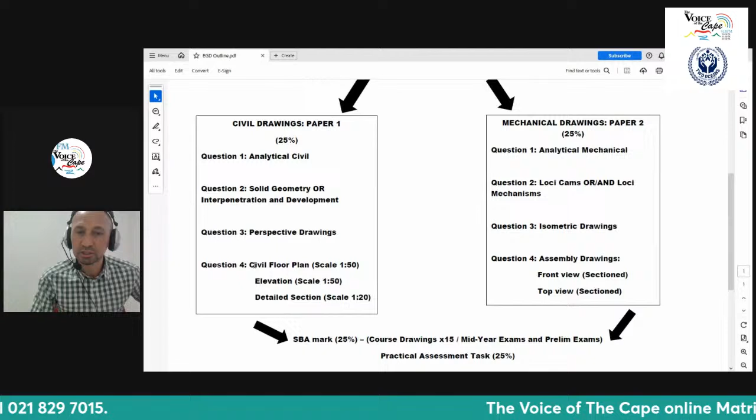So let us quickly look at where we are at the moment in terms of our sessions, where we started. I just want to go to that specific document and ensure that you look at where we are, so that we can navigate ourselves through the particular session that we're going to have now and for next week as well. Remember I started with this very document that I have on screen, which I'm sharing. We started at question number 1. We are now at question number 4. We've done civil floor plans last week, where we did a floor plan where the walls were given to a scale of 1:50.

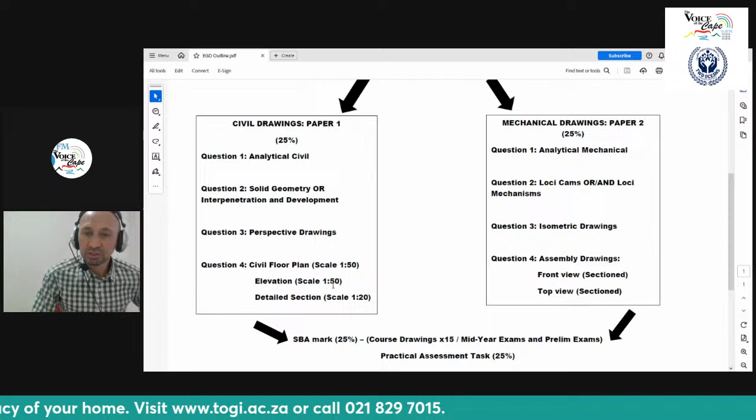And we continue with elevations. This particular week, we're going to look at the elevation which must be drawn on top of the floor plan. I'm going to change to my working document camera now, where I will show you exactly how to do the elevation. Keep in mind that both the civil floor plan and the elevation have a scale of 1:50. That is what our session is going to be all about this week.

So without further ado, let me change my screen and go to my workstation, and you will see that there I have the floor plan which we did last week. Now, this document that I'm viewing now is very important. Remember, all the information comes from this document, and last week we did 4.1, where we looked at the floor plan up until the 4th bulleted point.

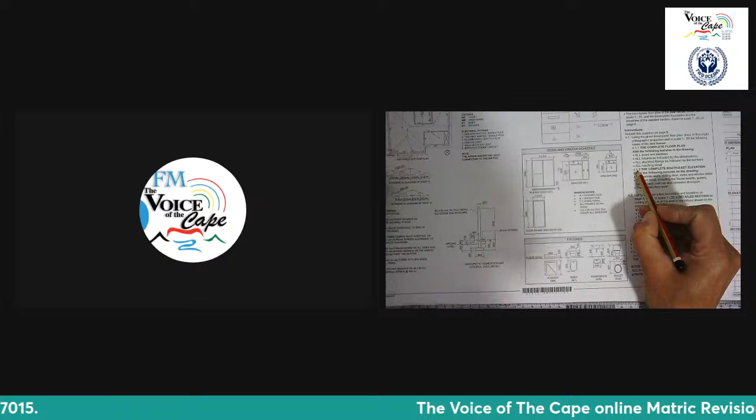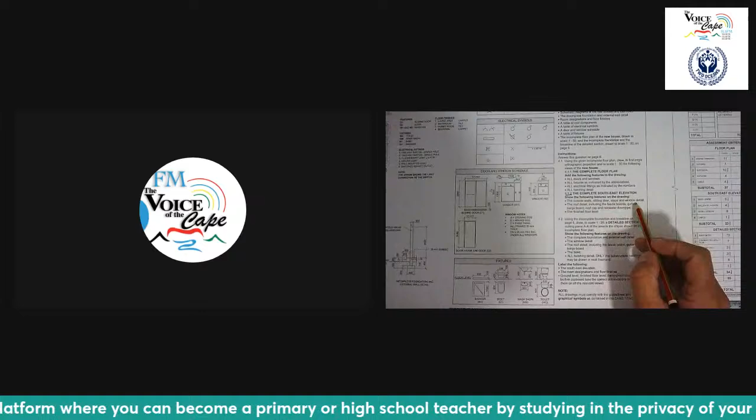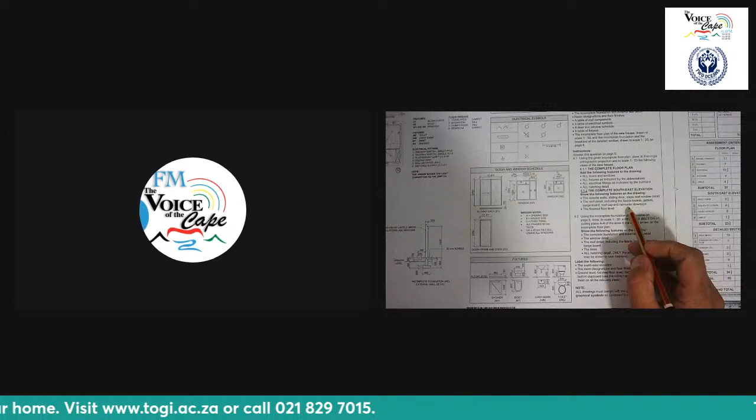We did all the hatching. This week we're going to be looking at 4.1.2, which is the southeast elevation. We need to complete the southeast elevation, and you will see that information is right here on my instruction page. I'm going to read it to you: you need to show the following features on the drawing - the outside walls, the sliding door, the steps, and the window detail. Bulleted point number 2, you need to show the roof detail, including the fascia board, gutters, barge boards, roof cap, and the rainwater downpipe. And finally, you must conclude with the finished floor level.

So those are all the things that we need to be able to do our elevation. On top of that, they even show you here what the elevation looks like.

So no learner doing this paper in Matric can say that you are not given sort of a head start. You are given a head start by the actual diagram of the elevation. The incomplete diagram of the southeast elevation has been given to you right there.

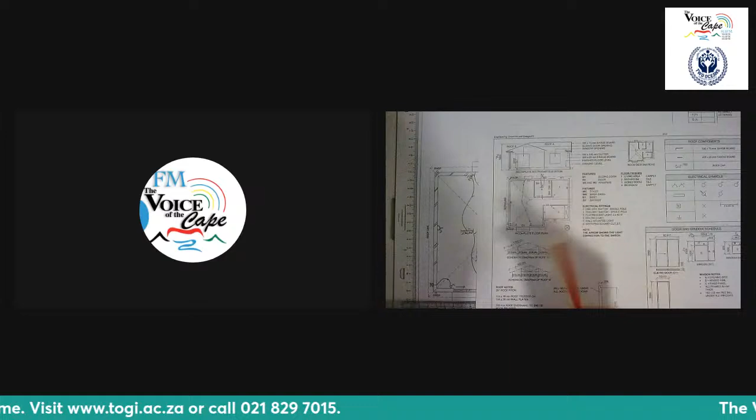All you need to do is project up so that you can complete this southeast elevation. Keep in mind, grade 12s, that the southeast elevation is this part of the house, which is where I'm showing you right now with my pencil. You are literally standing where I'm pointing my arrow and where my pencil is.

So I can see this D1, which is my sliding door, which is that over there. Let me just bring it down for you. I can see this D1, which is my sliding door over there. I can see the steps.

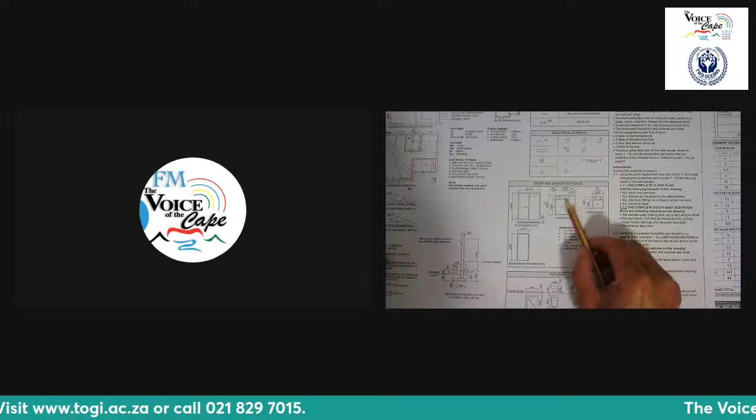That's there. I can move over to this side where I see W1, and you will see that W1 is the window 1 that we will see here, and the detail of window 1 is given here in the door and window schedule. So if you need the information for that particular window, you need to find it here.

Keep in mind, you have to scale it down because these are real dimensions that are given on the instruction page. You will also see that the roof lines are here in dash format, and the roof lines link up with these roof lines that you will see here.

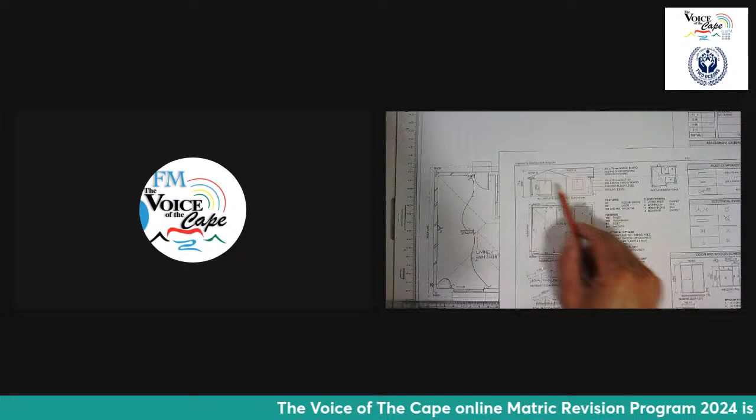You also will find in the instruction very clearly that there are break lines. Now please, what we've seen too many times during our exams is that learners actually draw these break lines. The break lines are there just to give you an indication what must follow through. So you have to follow through with that fascia board and gutter that you will see here. So that's all going to come out in my drawing.

Okay, so the first thing that I'm going to do now is project up, keeping in mind that I'm standing where my pencil is, and I'm taking a photo with my camera, and that is where that picture is going to be pasted.

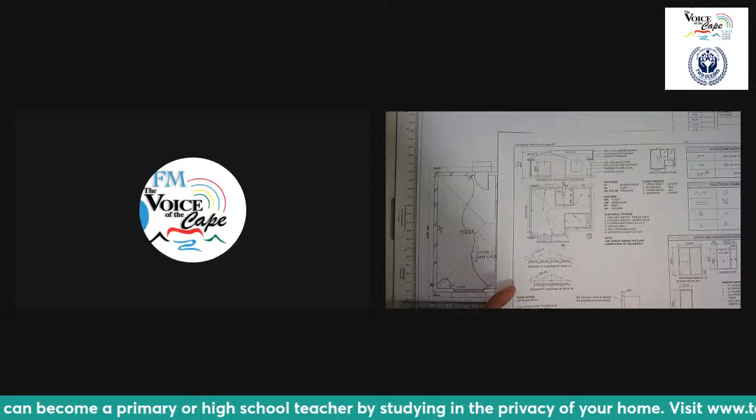I'm going to give you the structure very quickly, and then I'm going to refer every time to where I actually get the information. So the first thing I'm going to do here is project my walls. So you will see this wall going up very faintly, of course, and I'm going to draw up this wall over here as well, which is the start and the end of my elevation.

But of course, you will see here right at the bottom that it takes a 90-degree turn because that wall goes in here at the bottom. So there's another corner that formulates here, which I am going to project up to my elevation as well.

Okay, I'm going to zoom in on that elevation in a moment. So I just need to get my three corners.

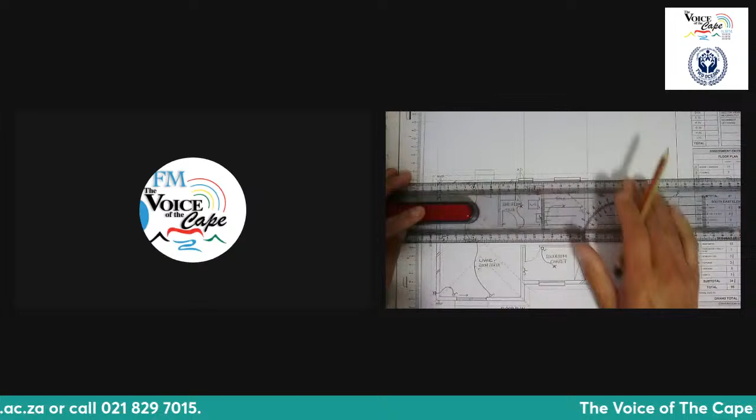And once I have my three corners, the next thing you are going to do, if it's not given to you, grade 12, is to create a natural ground level here. So I just want to show you in the picture my natural ground level, which I'm going to create at some distance away here, not too close to your floor plan. Allow yourself some space, but not too high because you have limited space on top of your drawing. So I would suggest maybe just enough space to write the south-east elevation.

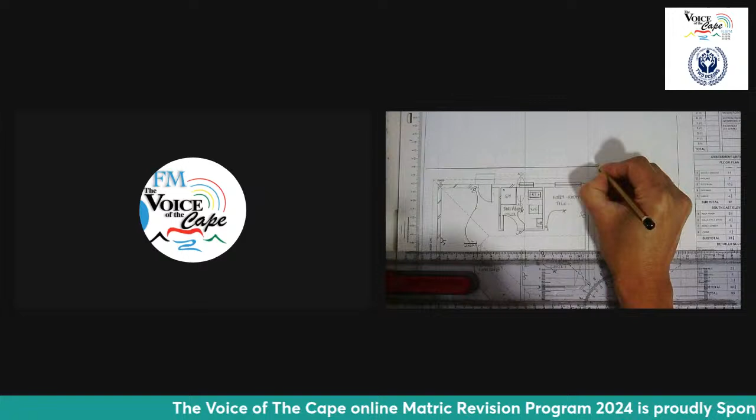So I'm going to draw a line here, and I'm going to darken that line immediately because that is my natural ground level. You'll see that it continues further than the wall corners which I've drawn. And once I have drawn that line, immediately I'm going to write on that line 'NGL', which basically abbreviates natural ground level. And for that, you're going to get a mark later on as well.

Right, and now I will have to go back to my instruction page because what I now need are the heights. I see here a height of 3,800, which is 3 meters 800. Keep in mind, I must divide that by 50, and it's going to be 76. So that will be 76. And with that, I'm going to measure, and I'm going to move my camera up so that you can see a 76, which is quite high.

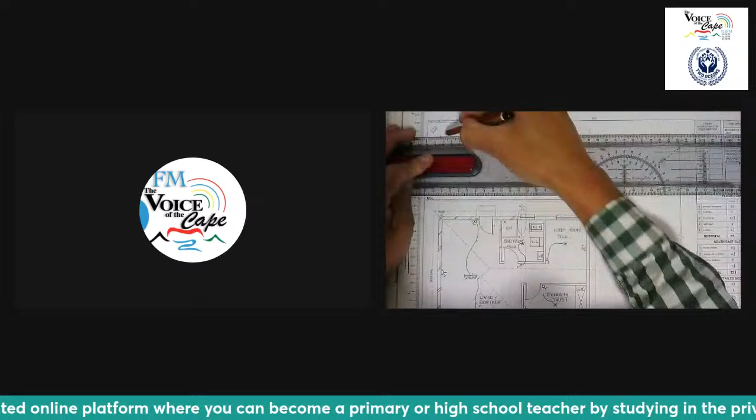And I just want to show you where that is in my camera. That is 75, 76 would be right there. So I mark my 76 and draw that line right through. That is now the height of the top of my roof, my 76, which is 3.8 meters.

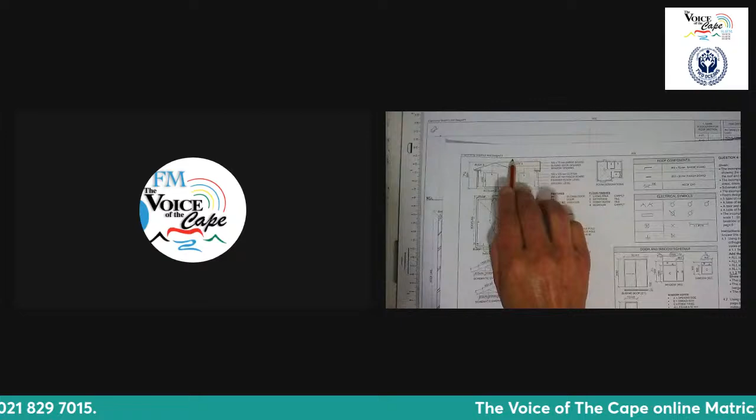I also now need to know that this line here is obviously this line that you see in my floor plan. So I'm going to project that down. In fact, this point here is the section I'm busy with right at the top, so I have to take it from my roof line. I'm going to project that line up till there.

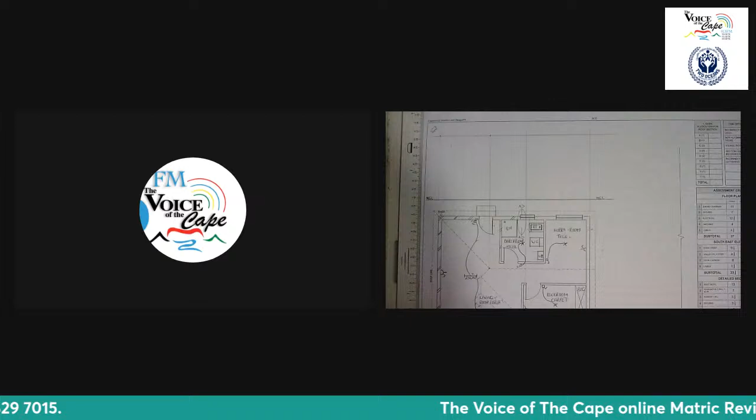And that is where the straight section would be in my instruction. That is the straight section. Then from there are angles this side and that side. And the angle is going to come from this particular line, because it sort of staggers like that. So I'm going to bring this line up here as well from my floor plan, and that is going to be my apex, which is the apex I see right over here.

So there's a difference, a height difference between this roof A and this roof B here. You can see it indicated in my floor plan as well, but you can't see the height difference directly, you'll see the line being staggered to one side, which means there is a height difference.

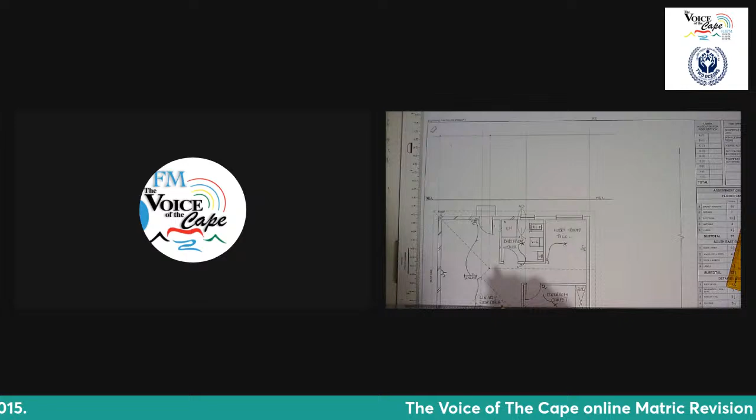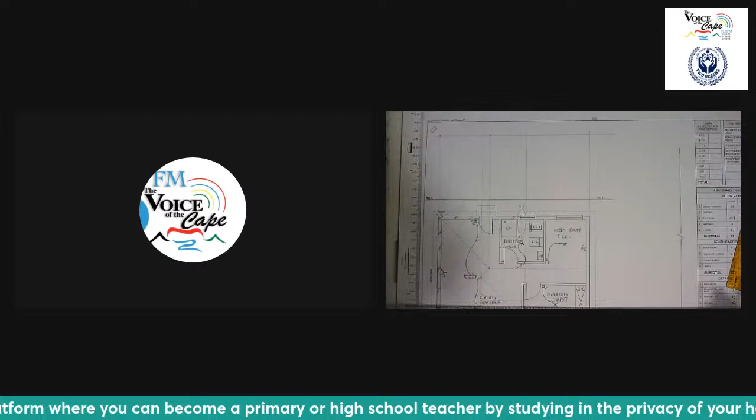Now there are angles here which we need to place. For you to find what that angle is, you have to go down to where it indicates roof notes. The first thing you'll find under roof notes is that your roof pitch is 20 degrees. So you need to go and find a protractor.

For 20 degrees, I'm just reaching for my protractor. And here I find a protractor. Remember, a protractor is a curved ruler. You need to make sure that this angle down here is going to be 20 degrees, so I'm going to flip my protractor upside down like that, and then place my center point perfectly on that point over there.

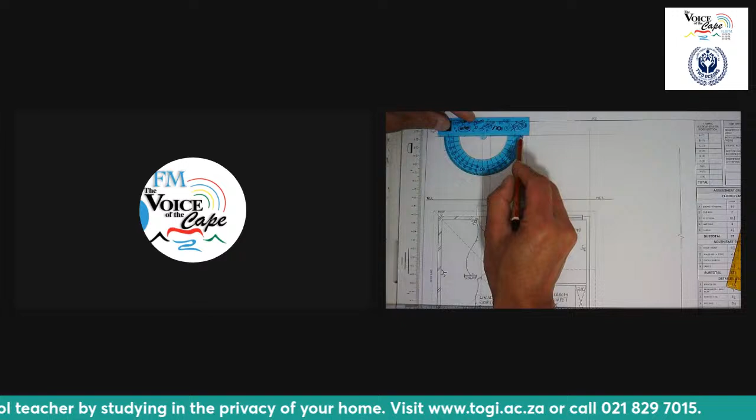There is my protractor, my zero is on that line, and I'm going to measure 20 degrees from that zero, 10, 20, right there. And I can do the same on this side, 20 degrees on that side. Once I have that, I can draw a line from my apex point that way, and a line from my apex point this way. And there I have now created my 20 degree angle that I have in my incomplete southeast elevation.

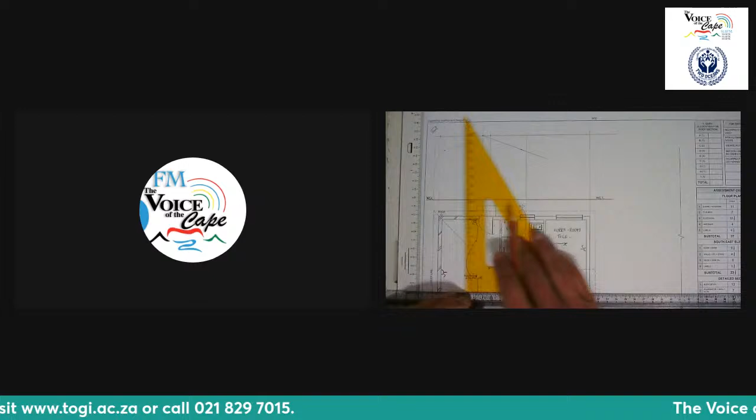But now remember, the roof has an overhang, and you'll see the overhang here on the sides, the roof being indicated by a dash line. So we need to project those lines from your floor plan up that way. And you'll see there is another one right here at the bottom, which I'm bringing up and projecting up.

This point is now very important, and that point over there. What you need to know is that there is going to be a barge board or a fascia board, a fascia board that runs right through, and that fascia board is going to be right here where the break line is. Keep in mind that point right there is this point over here.

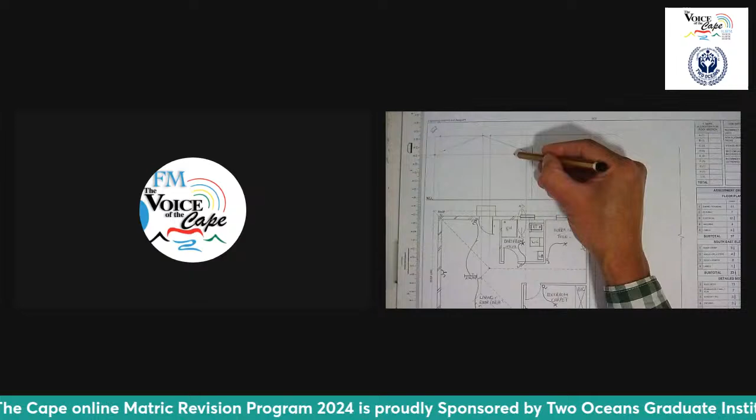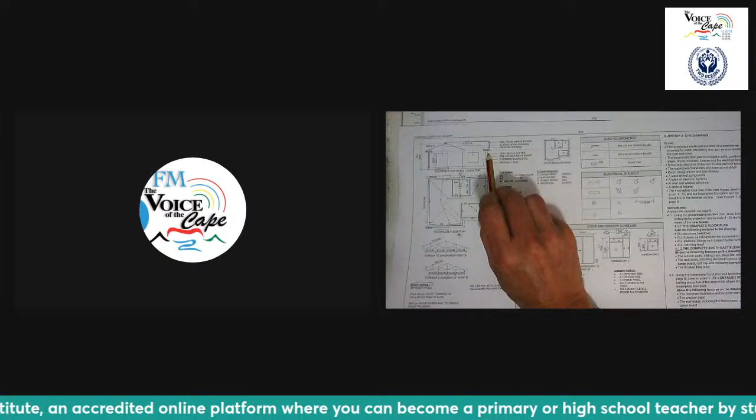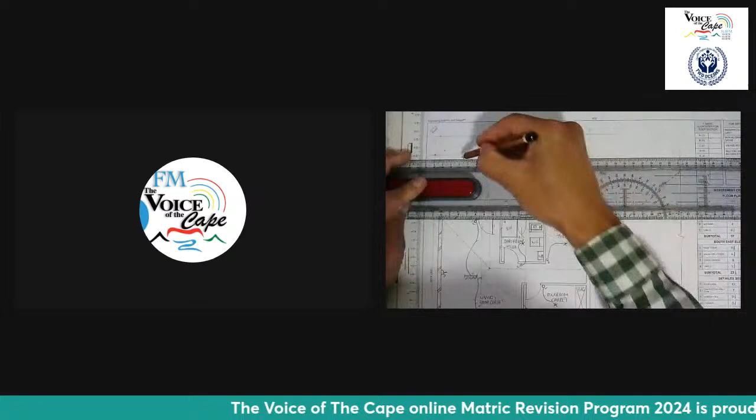So what I'm going to do is draw in my fascia board faintly. There's my fascia board, and my fascia board has a drop of 200, because it states here in my notes that it's a 200 by 20 millimeter fascia board, which is that over there. The thickness is 20, so that's not taken into consideration, we just need the height of the fascia board, which will be the drop from the top. So 200 divided by 50 is going to be 4 millimeters. You just need to measure 4. There's my 4 millimeters, and I'm going to draw my fascia board right there.

Once I have my overhang and my fascia board here, I can also ensure that attached to my fascia board is going to be my 150 by 100 millimeter gutter, which I'm going to place in. So 150 by 100 simply means 100 divided by 50, which is going to be 2. So I'm going to place that in the middle.

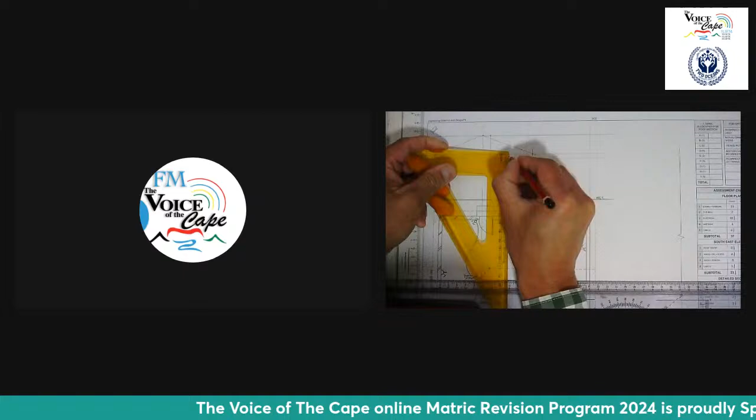Literally, I'm just going to measure 2 millimeters down from the 4 and have a line perfectly in the middle. Doesn't have to be in the middle, but if you can get it there, that would be perfect. That line in the middle represents either the top or the bottom of your gutter. So there we have that, it's in the middle.

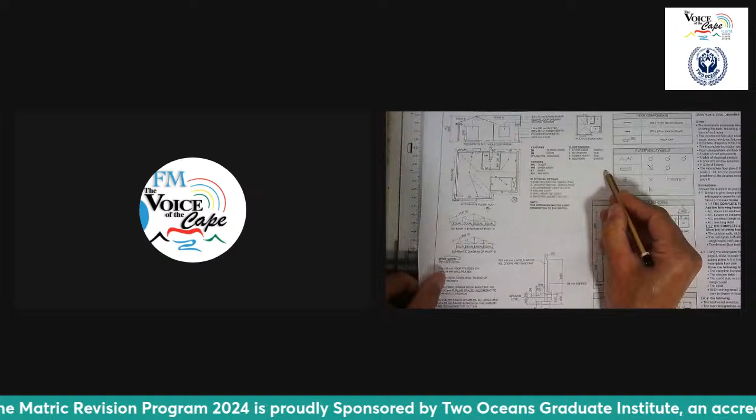On this side, you will see in your instruction that the gutter makes a return on the side. Now that little return that you will see here, I want to zoom in on that section. So there's your angle. This is the fascia board, that is 4 millimeters. Your gutter is in the middle there.

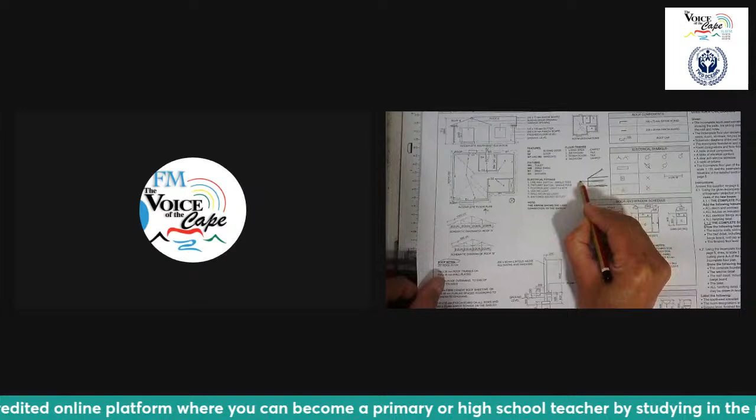Now, if your gutter is at the bottom, there will be a return, meaning that this return will be 3 millimeters further than the gutter. Keep that in mind, 3 millimeters further than the gutter. So on this side here I'm going to measure 3 millimeters, and here also 3 millimeters, which is going to be my return.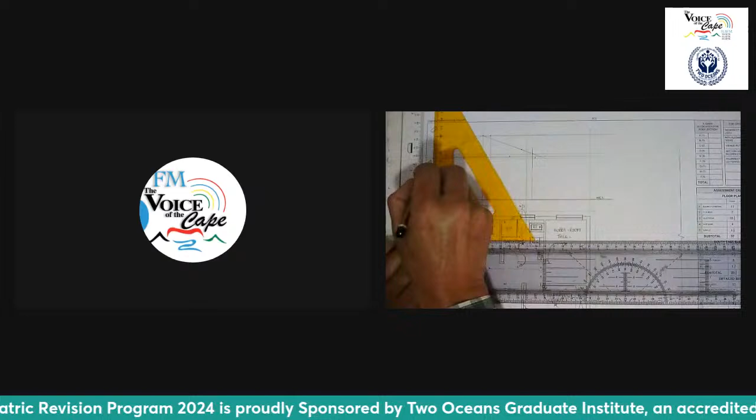And now I'm going to start darkening things. So I'm going to darken that 3 millimeters here, and I just want to zoom in a little bit so you can see clearly what I'm doing. I've darkened this short little line there because that represents the return.

And then I'm going to draw my fascia board, the top of my fascia board and the bottom of my fascia board, which I'm clearly marking now.

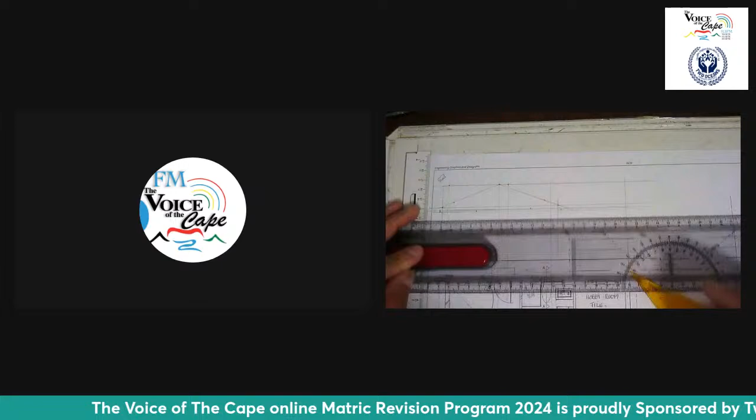Just before I do that, I'm going to do the gutter on this side as well. Here's my gutter, which makes a return on this side. I'm going to draw a line at the bottom, right through till there, and then another line right through till there. That line is the gutter.

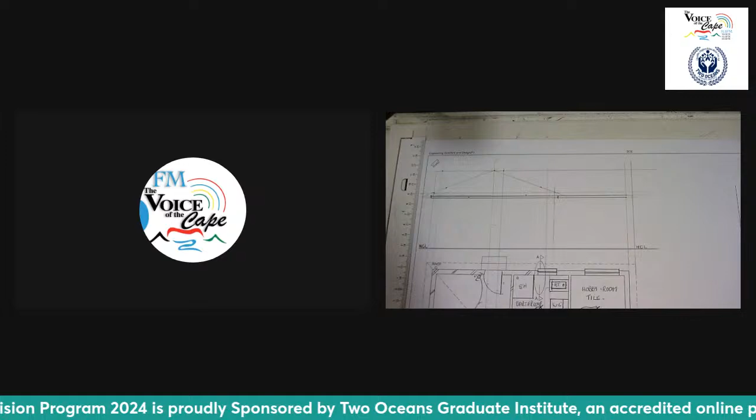Keep in mind that on this side, grade 12s, there is another overhang part here that we need to project up as well. Luckily this one is just a line that goes straight up, there is no slant on this section. You can see in your instruction there's no slant here, it is literally a gable-ended roof, a roof with barge boards on the side. So that can just go straight up, like I've done now.

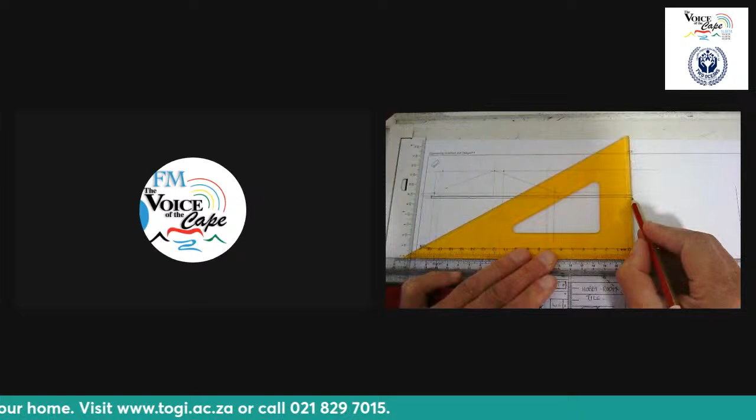So my dark gutter will go right until the end of that overhang, and I'm just going to stop it right here. With a gable-ended roof, the gutter does not go and return on the side. It only happens when there is a side that's slanted, where you have the slanted side here and the slanted side there, which means the gutter will return on the side for the water running this way and that way.

This is in fact a hip roof, which means the gutter will go right around, and the roof slants from all three sides - this side, the front, and this side here. But on this side, it is what we call a gable-ended roof.

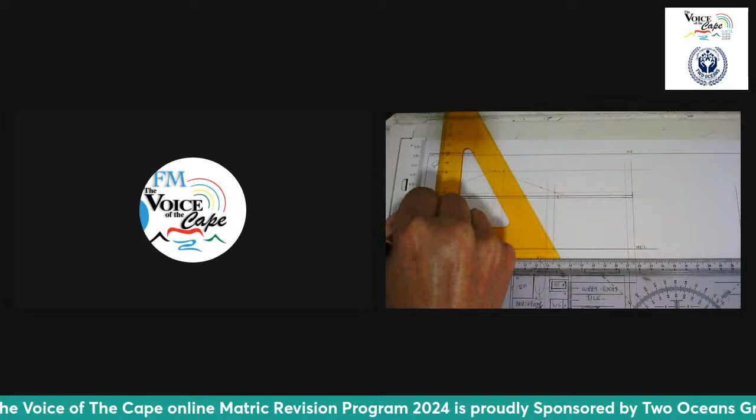Okay, so now I'm going to bring in my fascia board, the top part of my fascia board, which I'm going to draw here, drawing a solid line from one side to the other right through. And then I can bring in my slant of my roof right there, which is dark, and my slant of my roof, which is going to be dark right there. This obviously continues to this side here.

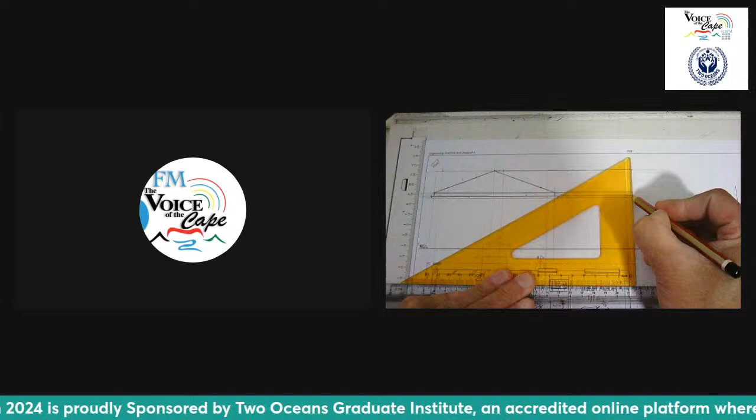And remember, this is all coming from my given incomplete south elevation. I just want to show you again, that is basically what we're drawing at the moment, but we're adding the detail that is supposed to be added according to the instructions.

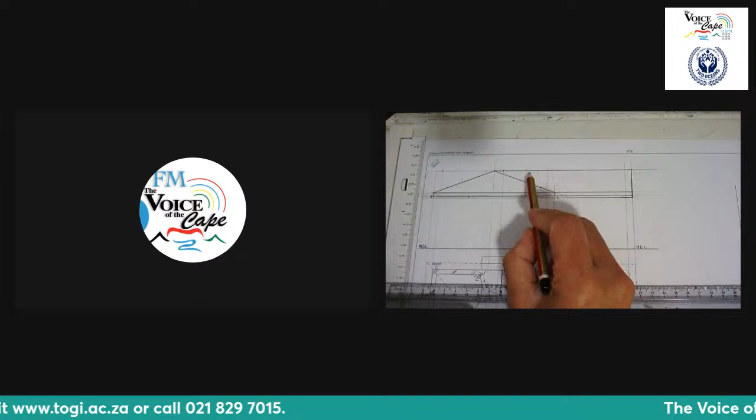When we add the roof, it is not fully completed. This is where learners actually lose a lot of marks, because you need to add a double line, which is literally 1 millimeter on the inside. That line is what we call roof capping, and it's just 1 millimeter on the inside.

You do get marks for both these lines, and many learners just leave out the one line on the inside—they don't show the roof capping. So we only allocate 1 mark if you leave out the other one, because one mark is for the height, and the other mark is for the roof capping.

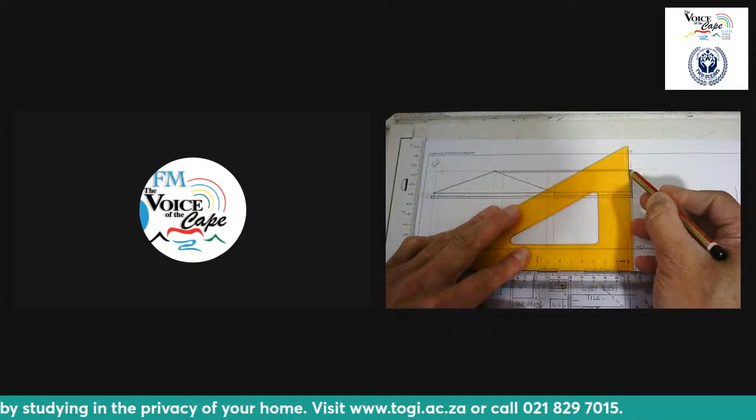Also on the side here, you need to add another millimeter line on the inside, which now represents your barge boards on the side. Many learners do not have those lines available because they only draw one line, so these lines are not available in many of the drawings that we mark.

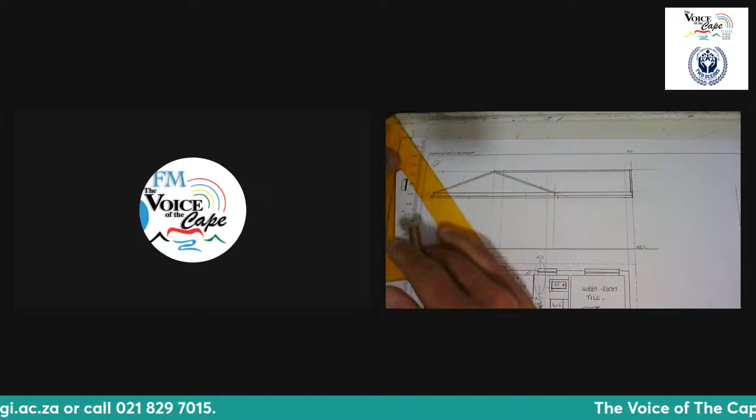So if you are looking at this video, please make sure you add double lines, literally 1 millimeter on the inside. The same applies to these slanted lines here—you put a millimeter on the inside, nice and dark, and a millimeter on the inside. If you include these double lines, every time there's a double line it's a mark: 1, 2, 3, 4, 5, 6, 7, 8. Those are all available to you at that moment.

Once you have that done, you obviously have to look at your downpipe, which is going to come in later, which I'm going to show you. But just before we do that, I want to bring in the walls.

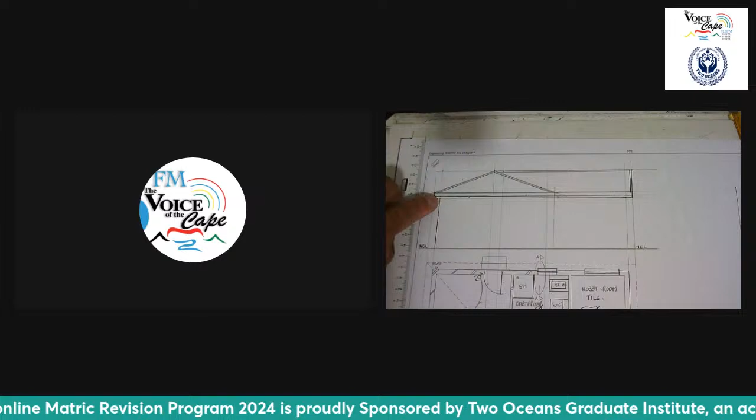Grade 12s, keep in mind I'm just sampling this for you so you can see exactly the format of how to do these drawings, how to do the roof, where to add the double lines. Because this is an overhang, you will find the walls will be right here, right under the fascia board. The wall for the one side of the front part of the house will be coming in there—that's the overhang. And of course here you will see the other wall ending. You can see there it all comes from the parts you see in front of your house where you are standing looking at the arrow.

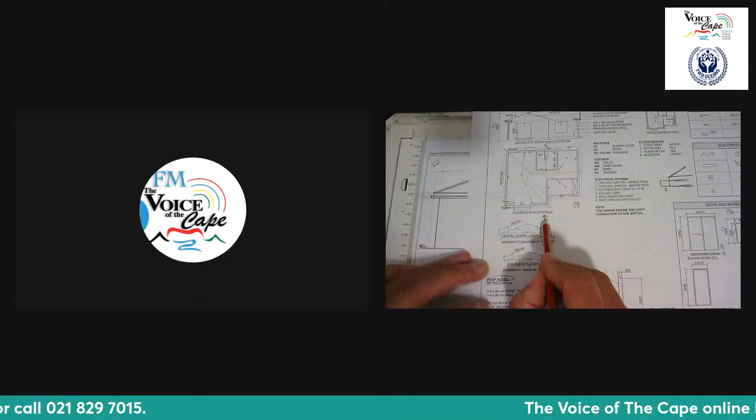Keep in mind there must be 3 lines for the fascia board: 2 of them represent the fascia board, and 1 represents the gutter. If you have the gutter sort of in the middle of everything and you have 4 lines, you are still just going to get 3 marks.

Keep in mind that you will have these lines serving as the roof capping and the barge boards, which you will have as a double line, meaning double marking. And then you will find the walls will just be on the inside, which creates the overhang.

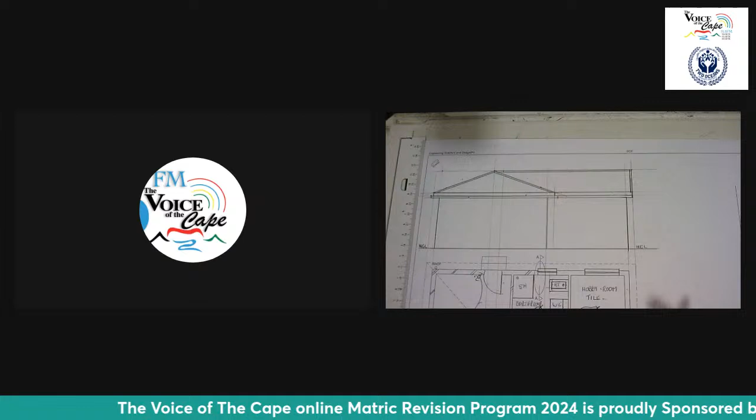What's going to happen next is you need to bring the downpipe into consideration. If you look at your drawing, you will find on the instruction at the bottom it says RWDP, which is in front—that is called the rainwater downpipe, abbreviating rainwater downpipe. You have to take that circle on your drawing.

On this floor plan, you will see it at the bottom—you can't see it now because I'm zoomed in. You have to project it up and create that downpipe that you will see running down here from the gutter. So I'm going to project mine up, and you will see clearly what I'm doing.

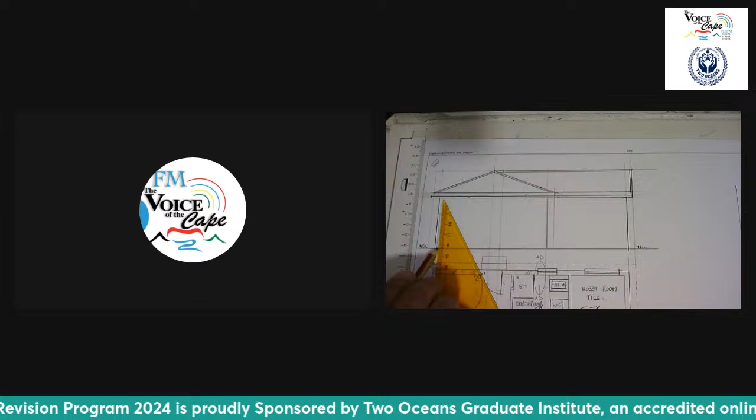So there is my one side—it's a very thin component coming up from the round downpipe, and I draw it until it reaches the gutter. If they don't give you the height where the shoe opening is, you simply put that in close proximity to where you find it on your drawing. Then I'm going to highlight my sides, and highlight this side here where my gutter is formed.

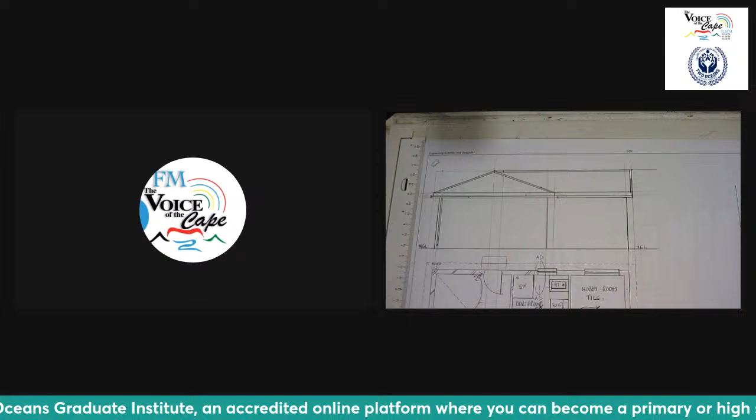You will get 2 marks for each of the lines and 1 mark for the exit point of the rainwater downpipe. We continue by now looking at the natural ground level and the level above that.

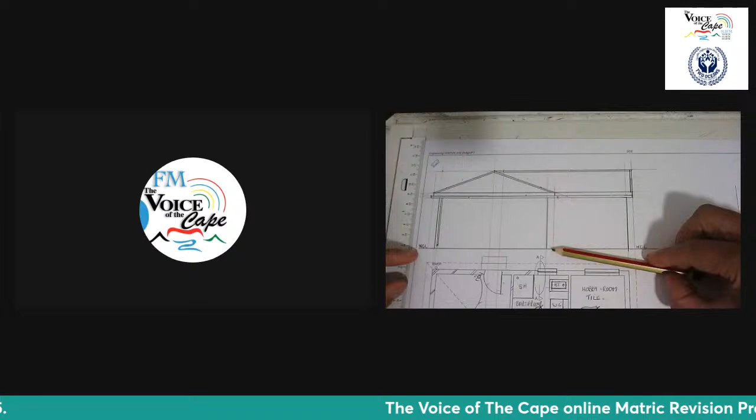Keep in mind the roof is now fully completed. So we are going to look at the natural ground level, which we have done already, and what is above that, which is this line you will see here, called your finished floor level, FFL.

Now, sometimes they will tell you the size of the FFL, finished floor level, and all you have to do is divide it by 50. But if they don't give it to you, you have to go to this detailed section over here. This is very important.

Look at where the ground level is here, and where the finished floor level is, which is here. The distance between the two is, in this case, 300. And that 300 must now be divided by 50.

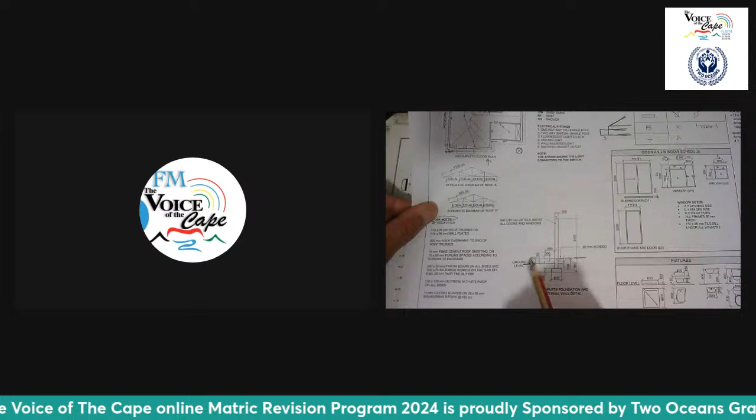300 divided by 50 gives you 6, which means I will take 6 millimeters up from the natural ground level and have a chain line, long, short, representing my finished floor level.

Now learners, you can see that it's not a dash line, it's not a solid line. This is the only line that will be allocated a mark, a chain line: long, short, long, short, long, short. That is your finished floor level.

While you're at it, anywhere on that line, I would suggest you just label it finished floor level, like you did with natural ground level. That's very important because these are all half marks for those labels.

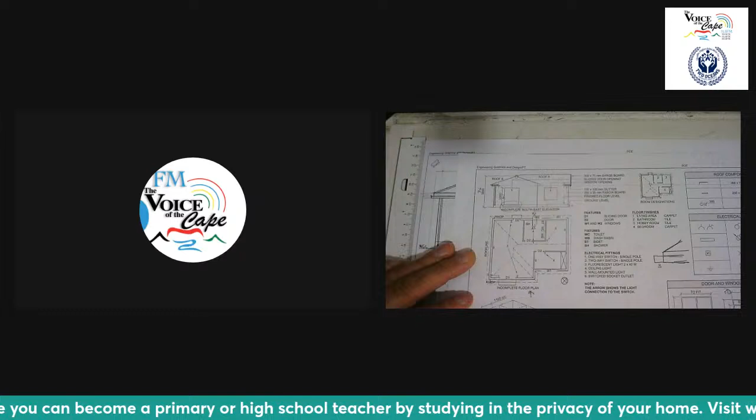Once you have completed that, you also find in your instruction that there are steps. These steps must be put in on this drawing because it is part of the front where you are standing. So all you need to do is project this up from your steps here.

You're going to project that up from your steps here, and the steps would be the height of the finished floor level, and one step would be half. So if the finished floor level is 6, half is 3.

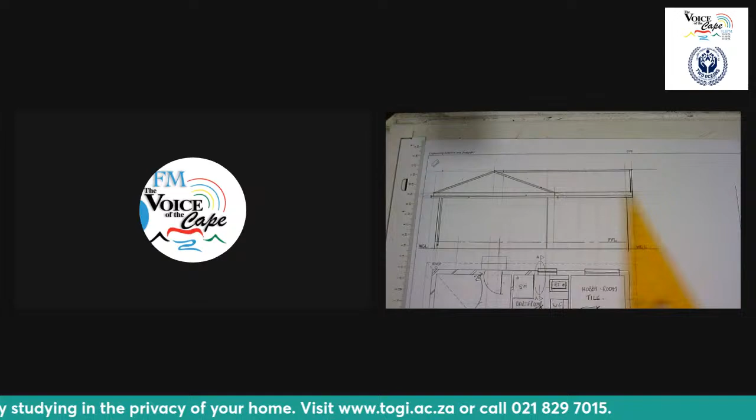So all I'm going to do now is eliminate some of the pencil marks here so I can clear it, and I'm going to bring up my step from my floor plan, there, and the other side would be there. I can immediately darken one side, and darken the other side.

As I've mentioned, if that is 6, halfway is going to be 3. So I've got to measure half. There's my half, and there's my 1 step, which I'm going to darken.

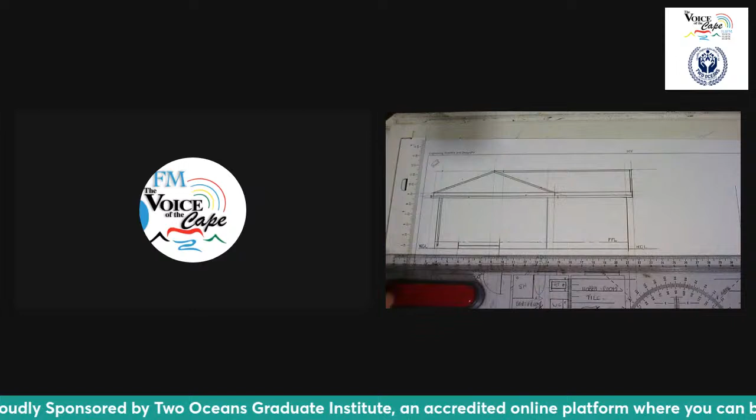Keep in mind, this line here will now change from a chain line to a solid line, because that now forms the height or the top of my second step. So you will get a mark for that line being a chain line, but you also get a mark for this now changing to a solid line.

So please keep in mind how I did my step. I projected it up and created it in the space between my natural ground level and my floor finish. Now I'm going to move on to other features in the walls.

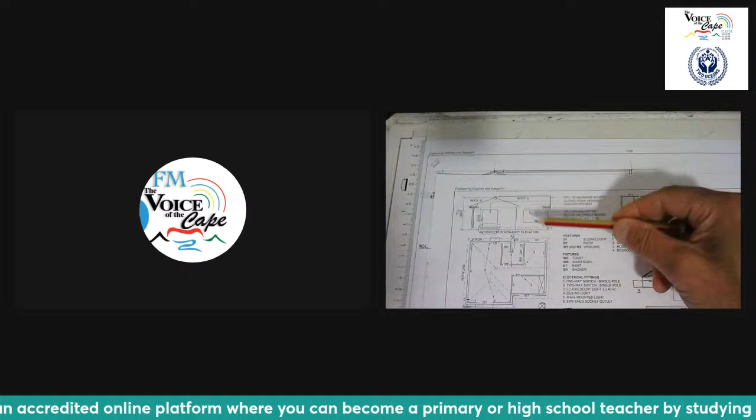I've done my roof, I've done my downpipe, I've done my gutter, I've done my natural ground level, I've done my floor, finished floor level. Now the only 2 things left would be my door and my window.

Quite straightforward. It features here D for door, which is going to be this door that you will see here, and that window that you will see here.

The first thing that I'm going to do is create the gaps for it by projecting it up. So let me do that. My projection from the floor plan will be up.

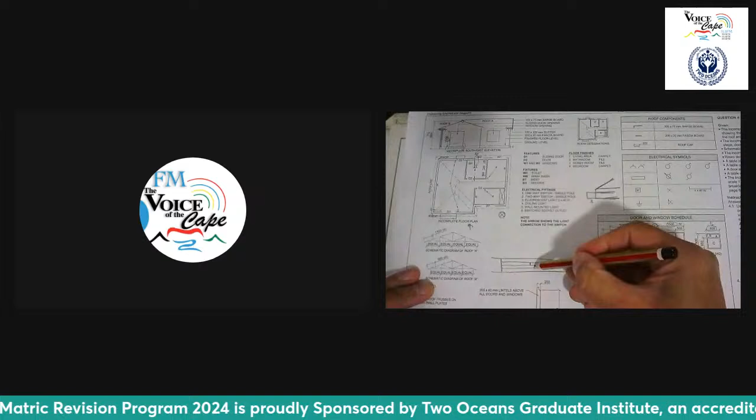Learners, keep in mind as I project my window and my door up into that space where it's going to be drawn. If you project your sliding door, remember what it looks like in your floor plan: you did 3 lines like that, and then there was a staggered section. Now the staggered section lines here must be projected up as well. You also had an arrow here which stated the opening of the sliding door. That arrow must be brought and taken into consideration up in that space as well. So let's do that quickly.

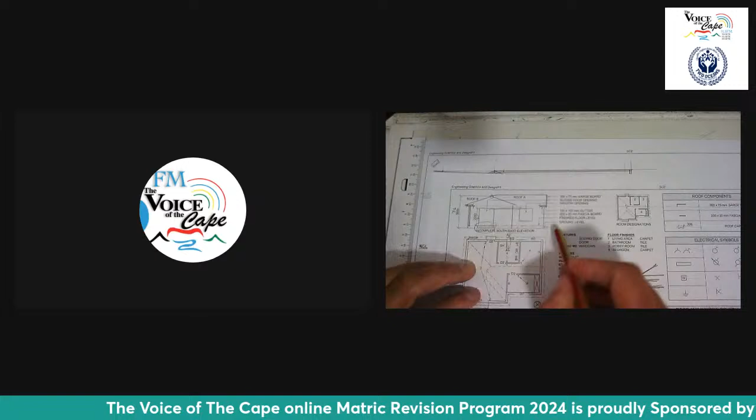So bringing up my staggered section is going to be there and there. Now the height of my door and my window, which is the same height, you can see here it falls on the same line. If you look at the instruction, it will tell you it is 2050 divided by 50 because of the scale gives you 41. So from the floor finish, you are going to measure 41, and your 41 is going to be right here. So you're going to measure 41, and once you have it, you're going to draw your line right through.

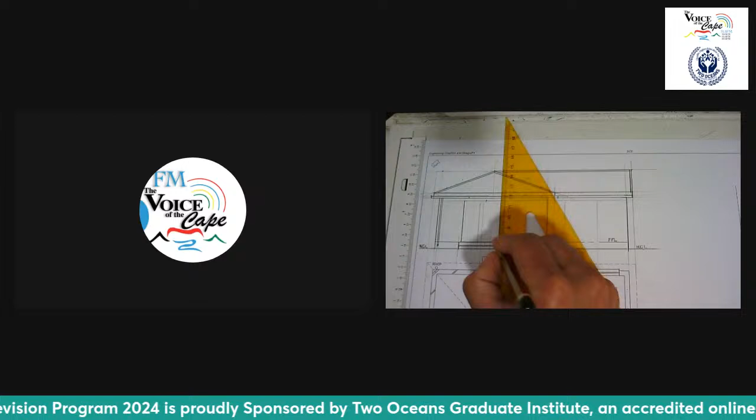Keep in mind, the sliding door is from the finished floor level up until the 41, so I'm going to highlight that by darkening it. That's the one side, and then I have the other side. Then I have one door that overlaps with the other door, and then my height will be there. And then of course I will include my arrow, showing how it opens. So you will get a mark for this side, the in-between ones, the one side, the top, as well as the arrow. Sometimes they even include the bottom, which is the base of the sliding door. Then your sliding door is done - nothing else needs to be added to it.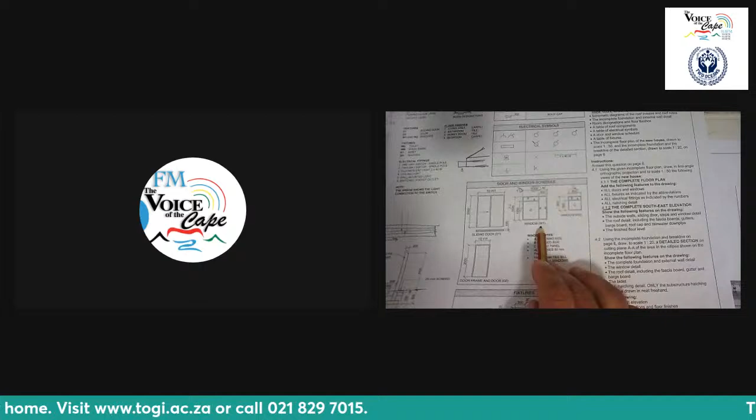Let's go to the window. Remember, the window has the same height as the sliding door unless otherwise specified. So the window we are busy with here is window 1. If you go and examine, where is window 1? This is window 1 - that is the width across, which you have already because you projected up. You need the drop. Now it is a square because it's 1 meter 500 across and 1 meter 500 in a drop as well. So 1 meter 5 divided by 50 will give you 30 millimeters, so you will have to measure down 30.

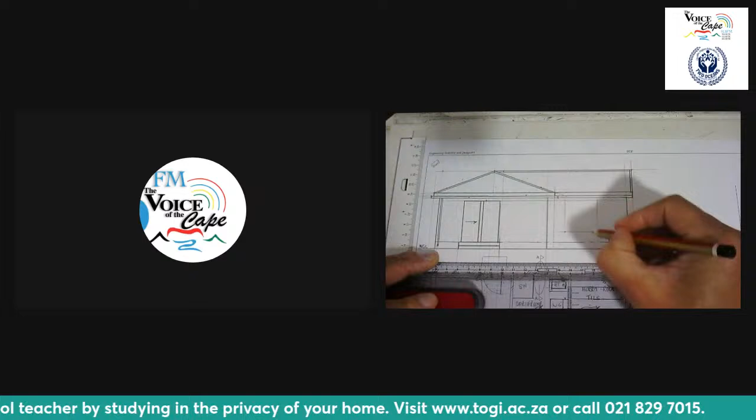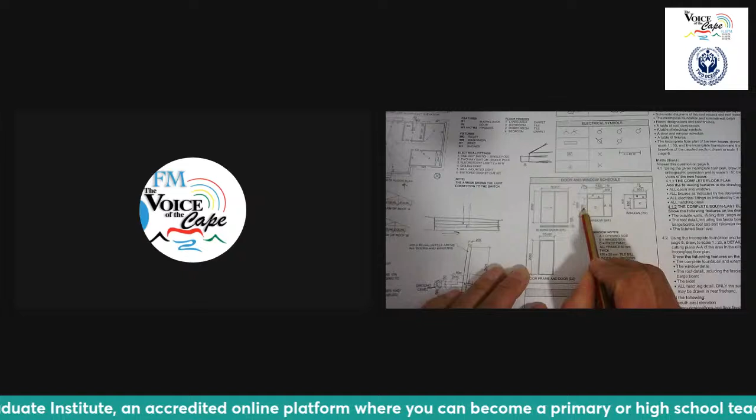And there is my block - in that space I will have my window. Now you can't leave it like that. You are going to get marks for all 4 sides, but the window actually looks like this, so you have to put in all the little detail, these subsections that you will see here. You will see here it's 1 meter 200 up to have that pane of the window, this opening and closing side, and that opening and closing panel there. So that 1 meter 200 divided by 50 is 24, and then I have a 500 here which divided by 50 gives me 10.

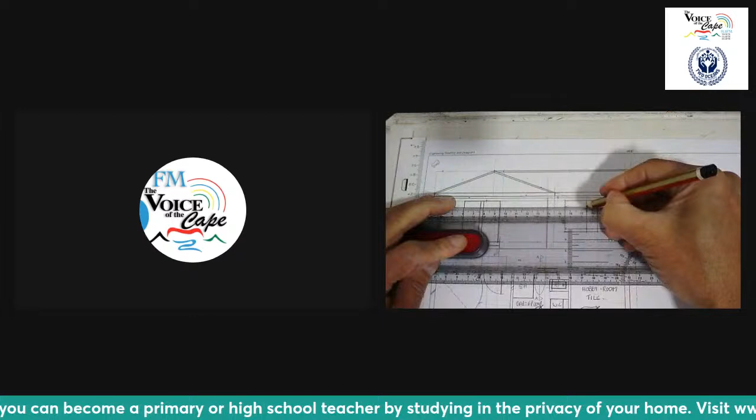So let me do that - I'm going to have my 10 measured here. There's my one side, my 10, and my 24 up, right there. And there I've created it - now I can darken my window. Now you will see in memos that you might download from the department's website that the windows actually have double lines. But there is no need for a double line because you only get one mark. The detail is so small that there is no need for it. Remember, these are all drawn on computers, so they can add double lines, but we only need a single line because you only get one mark.

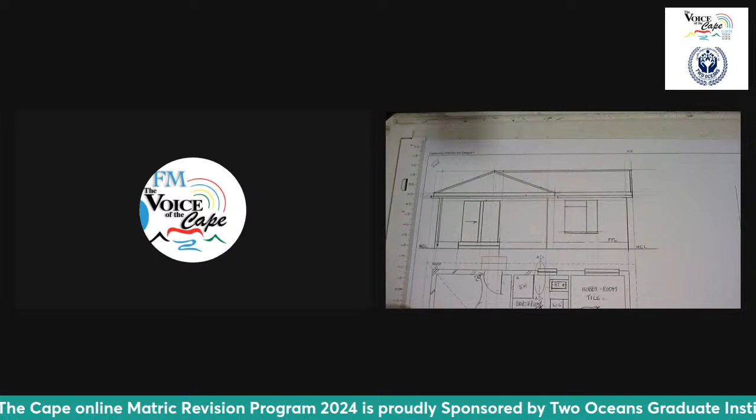But when you have this window, do not forget the only double line that's going to come in here is at the bottom, 1 millimeter away, and that line represents the window sill. Many learners have a tendency of forgetting that specific line, which represents your window sill. All other lines are single lines - that's the only one that's double because it represents your window sill. Then you have these things here that say A is an opening side and B is a hinge side, meaning that the hinges are here - that's going to be how it opens.

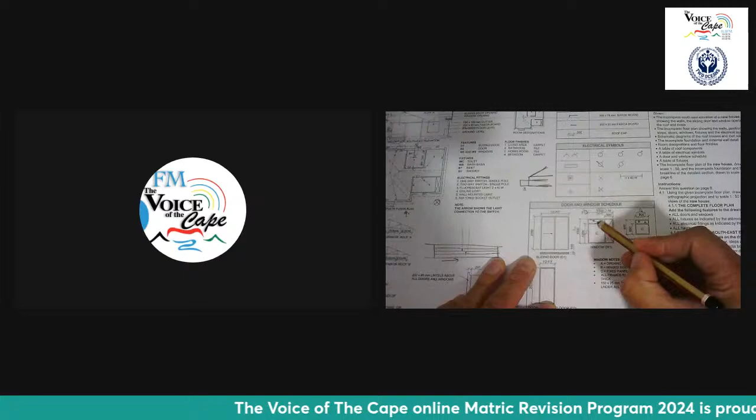That's the latch side, and you will have this coming like that so that you can open it for ventilation purposes. So you have to put that in.

What you need to do is create the distance here as 30, so you're going to create 15 there. You can either draw a faint line, a dash line, or a chain line for these openings. It doesn't really matter the type of line that you use here. You can use any type of line and you will still get the mark.

Here we have 20, halfway is 10, and I'm going to put a dash line in there. Once you have this, you will get extra marks. So that's all the marks here for the straight sides and the in-betweeners, and you will get for the opening side as well, the opening and hinge side of the window as well.

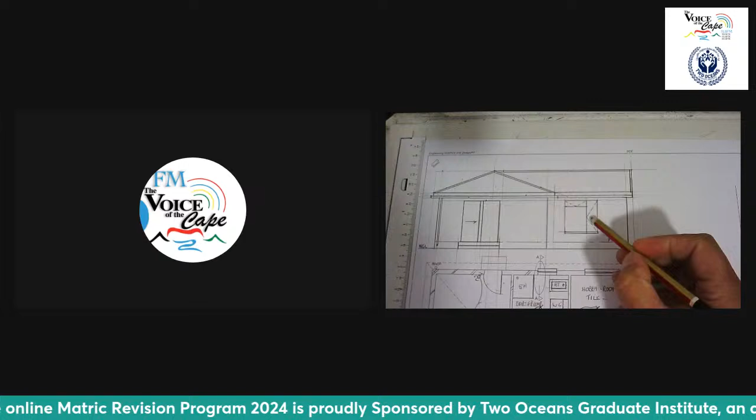And there you have your door and your window, as you have it placed in a specific position from where you have drawn it in your floor plan. The only thing I need to add is my label, which is going to be in between here, or you can have it on top, doesn't matter, where you are going to write in capital letters, print: south east elevation.

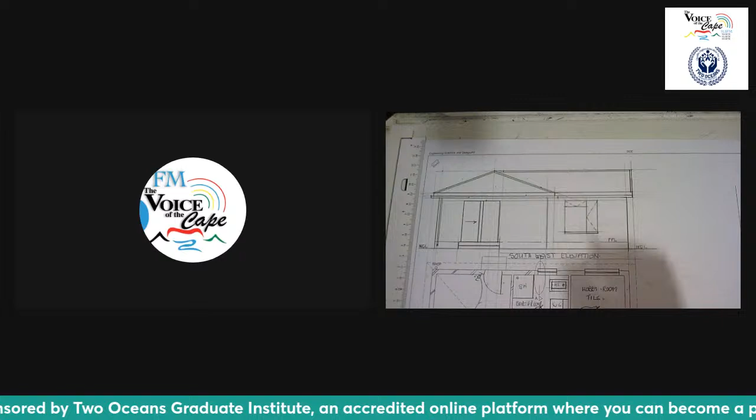And I'm doing it very fast. Southeast elevation: you have natural ground level, you have your floor finish over there, you have all your window detail, you've got your sliding door detail, you've got your step, you've got your downpipe, you have all the different lines in your roof structure.

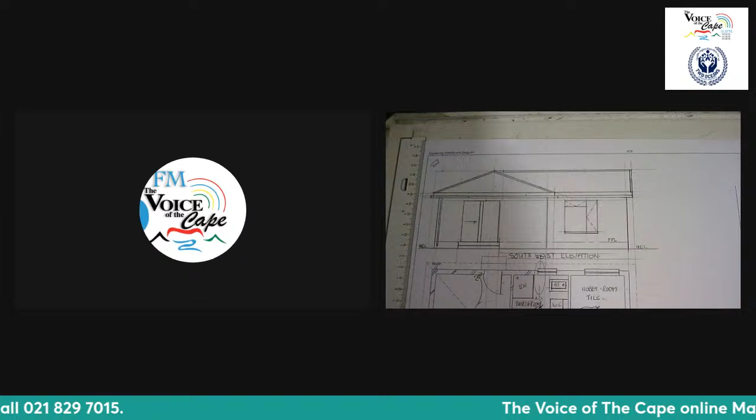Your gutter, everything is there. If you check it according to your southeast elevation rubric or assessment criteria, you have your roof and your rainwater downpipe, you have your walls and your steps, you have your door and your window, and you have your labels.

And by having all of that, you can only get a mark which is allocated here, 23 marks, which is the worth of this particular drawing, and which you should only get 23 out of 23. And that, my dear learners, grade 12s, is how you project and complete your elevation on your floor plan in question number 4.

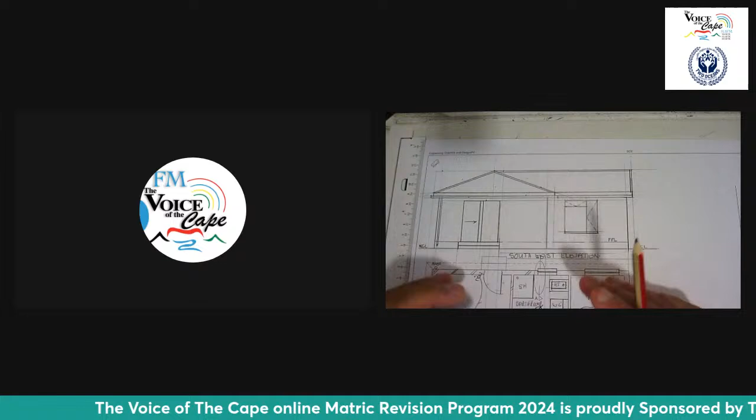Remember, this particular question is broken up into 3 parts, of which I've done the floor plan. Today I've done the southeast elevation, and next week, very importantly, is going to be the section, the detailed section, where many learners struggle with the roof and the window, how to draw a section view through a door and window, and even the foundation, which they've learned about in grade 10, and what's in the backdrop.

And that will come out in our session next week, which is going to be very exciting. Guys, all the best. Practice, practice, practice to ensure that you attain perfection. Shukran so very much. Assalamu alaikum wa rahmatullahi wa barakatuh, and greetings to all.